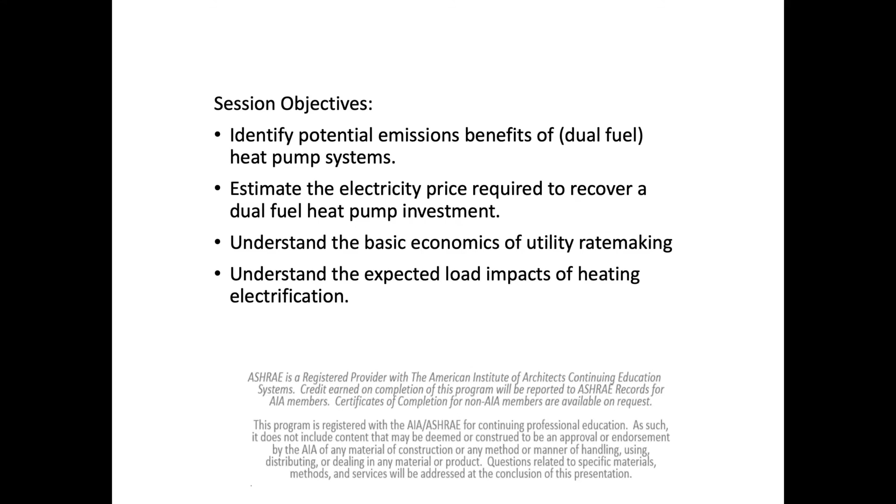Great. So there's been a lot of talk about smart buildings, smart grids, smart everything. What's available right now? So if you go onto Amazon for 118 bucks, you can get 2 light bulbs with a dimmer switch and this little Philips box here, which connects it to your Wi-Fi. I've spent a lot of time playing around with these early on in my PhD. They're very cool, but they're light bulbs. What else can you buy?

You can buy an Alexa-enabled microwave. You can get lots of smart outlets. They even sell on Amazon a smart bidet. I don't want to know much more about it than that. The issue is if you add up all of the energy use from these things, it's really not that much.

So this is data from the Energy Information Administration, which does a survey every 4 years called the Residential Energy Consumption Survey. This is 2015 data. We are waiting patiently for the 2019 data to come out. And if you add up all of your lighting, refrigeration, and all your other plug loads, it's less than 30% of the average energy consumption in a US home. The lion's share of residential energy use, and I know commercial energy use is balanced a little bit differently, but for residential, upwards of 60% of energy use is for space and for water heating.

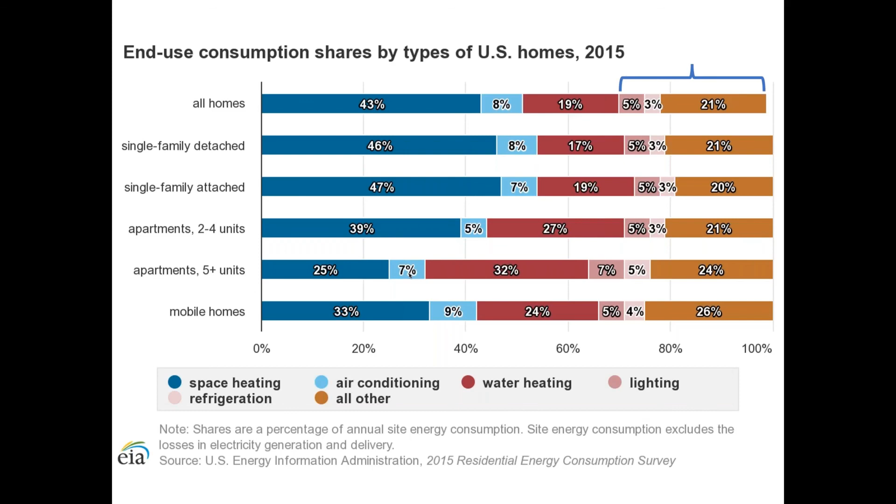So there are multiple approaches to dealing with this. The one that I have been focusing on the most is electrifying the heating in buildings and then providing that with clean power. So we're all HVAC engineers. I'm not going to spend a ton of time on technology.

Broadly, there are 3 technologies: electric resistance, cheap but inefficient; ground source heat pumps, very efficient but very expensive, especially for retrofit jobs; and then air source heat pumps are what are most exciting to me because they're essentially just a 1-for-1 replacement with existing split systems, whether a mini split like this or a full DX split system that you'd see in a forced air system in a home.

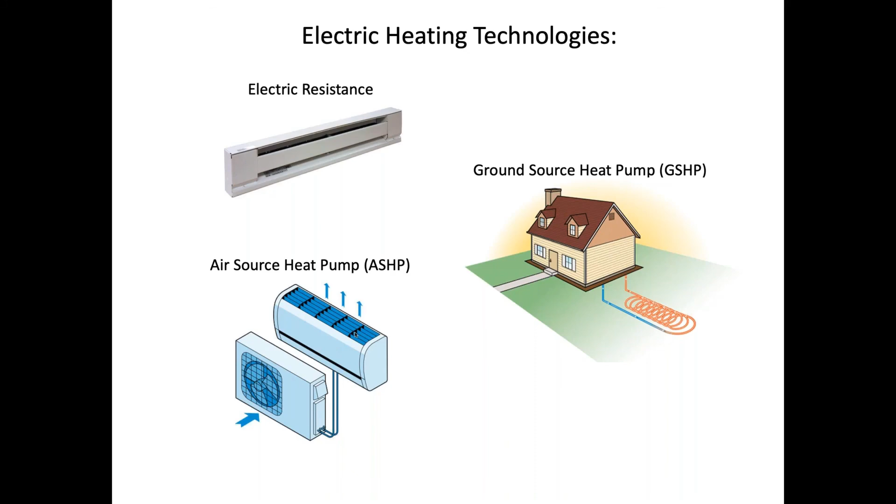Why would electrification decrease emissions? So if we just start with 10 therms of natural gas and we put it through a traditional furnace, we'll get out 117 pounds of CO2 and 800 kBTUs of heat. That's kind of the starting point.

Now, if we have a condensing furnace that's 96% efficient, the emissions are the same, but you get 960 kBTUs of heat. That's a 20% improvement. And that's basically, if there's been a big improvement in the last 20 years, it's this. It's that we're using more condensing furnaces.

On the other hand, if we took that same gas, we put it through a combined cycle gas turbine, which is about 60% efficient, we get out our same CO2 emissions, but we get 176 kilowatt hours of electricity. Now, what we do with it matters. If we put it just through an old school electric resistance space heater, we'll get out 600 kBTUs of heat, and that's really our worst case. That's worse than just burning the gas on site.

On the other hand, if we put it through a heat pump with a COP of 3, we can get out 1800 kBTUs of heat, which is worlds better than any other option on the page. So at least as far as the back of the envelope is concerned, there seems to be some potential for heat pumps.

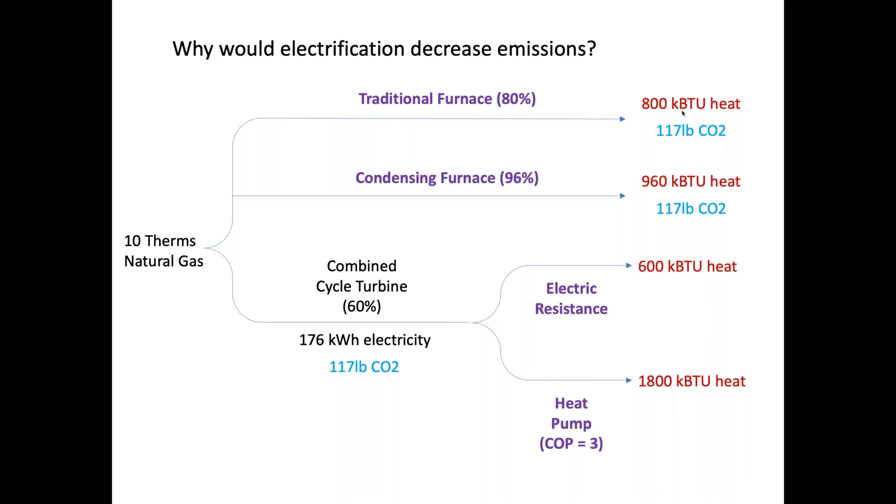Now, having said that, the actual estimates for heat pumps are pretty modest. This is data from the US Energy Information Administration's Annual Energy Outlook, where they project out the next 30 years or so. And you see that for residential space heating, the energy use, and this y-axis is in quads, these lines don't cross. We see modest decreases in demand across the board. Most of that is just a product of energy efficiency, but they don't see any big uptick in space heating.

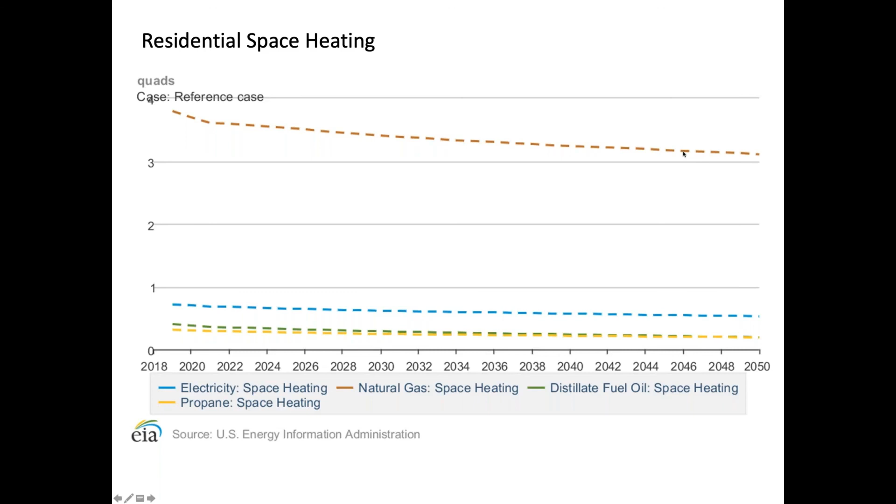So let's say you're burning 3 3/4 quads today, and you'll be burning 3 1/4 quads 30 years from now. You're still bound to chemistry. So you're not going to dramatically reduce the emissions from that. It's still a direct relationship between how much you burn and how much CO2 you get.

Water heating, the projections are basically the same. We're not seeing the same energy efficiency benefits because water heating is already pretty efficient. So we're actually seeing a modest increase in natural gas consumption there, which would lead to a proportional increase in emissions.

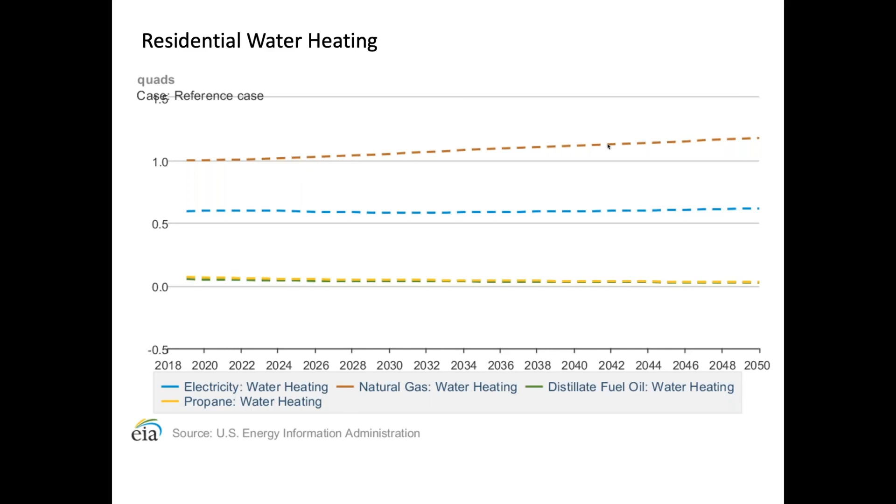So coming from the starting point that heat pumps seem really promising, and yet the current estimates don't project that they're going to be widely adopted, I started asking, well, why? First of all, is there something I'm missing? Maybe I'm overestimating the actual emissions benefits. So the first question is, what are these emissions benefits of heat pump adoption when we look at different climates? And then the second question is, what are the economics?

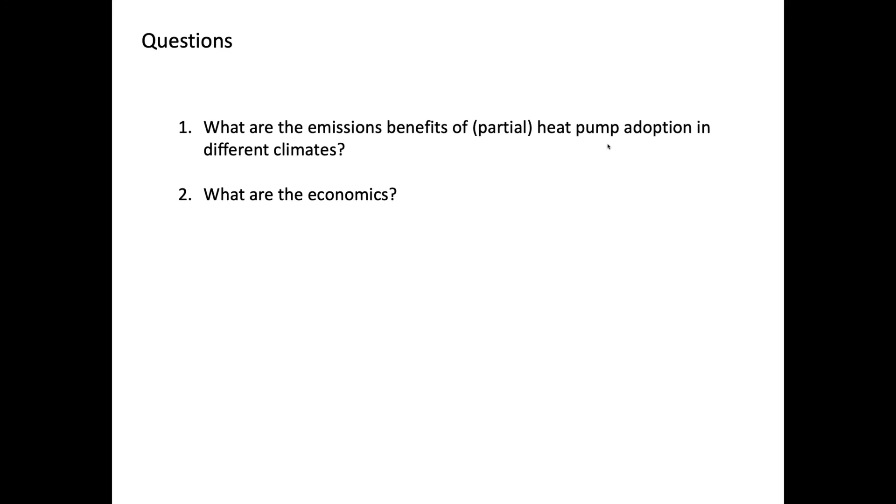We're specifically thinking about hybrid, also called dual fuel or bivalent heating systems. And basically the strategy with a hybrid system is, if you've got an existing home, and most of the buildings we have in 2050 are the buildings we already have now, after say 15 years, your AC split system breaks, you replace it with a heat pump. A heat pump could be exactly the same size. If you've got a 2-ton AC, it could be a 2-ton heat pump, could be bigger if you want to heat it to a slightly lower temperature. You retain your furnace as a backup for those really, really cold days.

The advantage there, and I think you guys mostly know this, is heat pump COPs, the efficiency, really degrades when ambient temperature drops. So you would need a much bigger heat pump to heat a building down to say 20 Fahrenheit than you would to heat it to 30. And the further you go in those extreme situations, you need bigger and bigger heat pumps, and they're operating less and less efficiently.

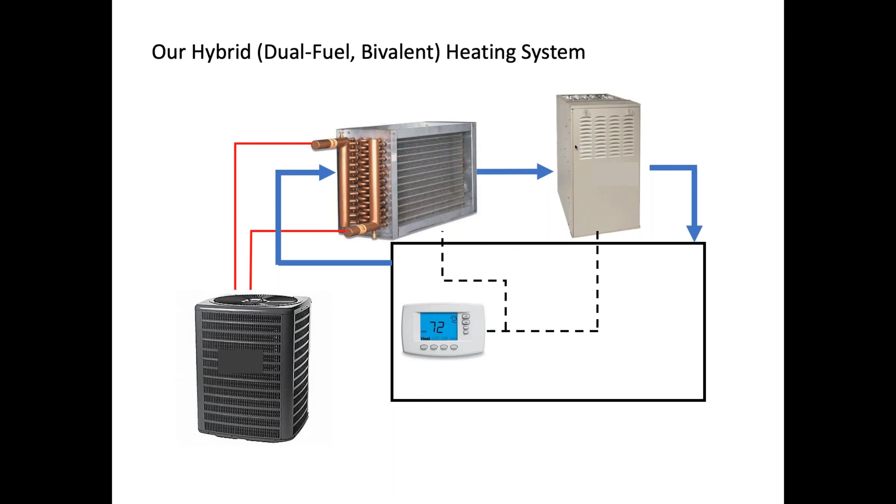The big thing, I think the big sell for this project, and the reason it was pretty well received at ASHRAE Orlando, is because we looked at every climate region in the United States. So according to the International Energy Conservation Code, they give us 16 different climate regions, varying both in your average temperature and in moisture. So I'll just go straight forward to the results and what we found doing these simulations.

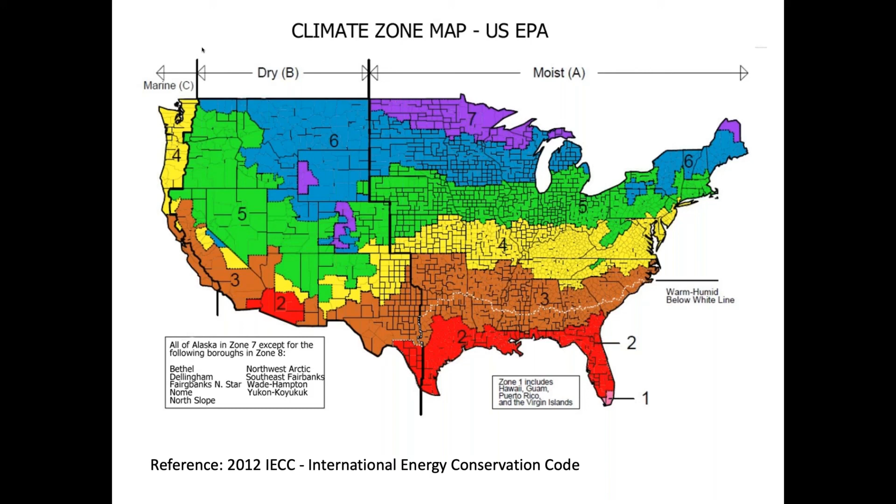And basically we did these simulations in EnergyPlus, taking the same building model, moving it throughout the country, and basically just changing the weather and changing the heat pump capacity, and then doing the math on what it would actually cost to run these things. So each of these different tiles is a different example city, representing a different IECC region. So 1A, Miami, very little heating demand. 3C, San Francisco, more, all the way to Duluth and to Fairbanks.

The two different colored bars: all of the orange bars represent natural gas homes, homes that are currently heated by natural gas. The red bars are homes that are currently heated by fuel oil. And for each of these tiles, the first set of bars shows the base case, where we just replace your old AC that's dead or dying with a new AC system and continue to get all of your heating energy from whatever the incumbent fuel is, natural gas or fuel oil.

And then the second bar is, well, what if we say for this home in Houston, where the minimum size for the AC was a 4-ton unit, what if we replace that 4-ton AC with a 4-ton heat pump? What would the emissions impacts be? Now, despite the huge variance in climate regions we looked at, we actually found pretty consistent results here. And that was really across the board. There are huge emissions benefits to just that first change from replacing an AC split system like for like to the same size heat pump system.

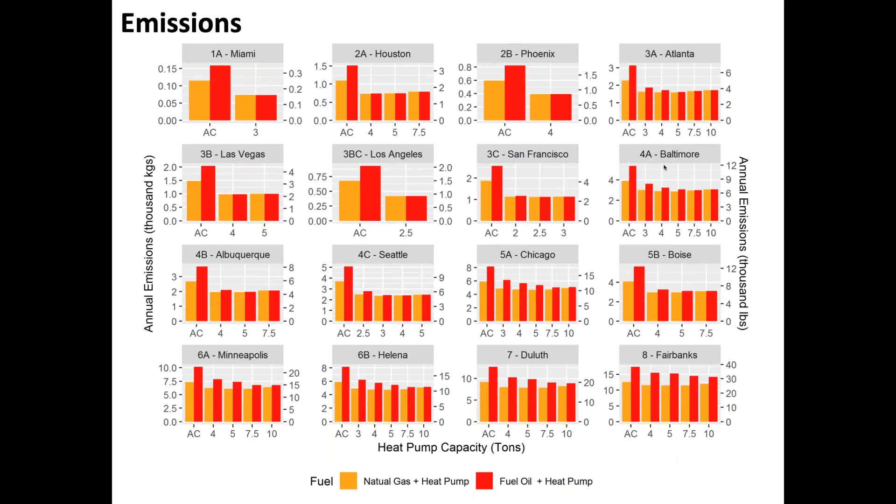So that's really just kind of a hint at what things might look like from an emissions perspective. One caveat I'll put on this is that we just use the same grid assumptions for every city. We didn't actually say, well, San Francisco has more solar and hydro, so it's going to have a different heat pump story than, say, Boise. We're really just trying to look at the weather here. So when you see San Francisco, think more of a generic climate IECC 3C, and if you don't know what that feels like, it feels like San Francisco.

So then the second part of this is at what price would your electricity have to be to break even on this kind of investment? I'm not going to walk you through every term, but this is just a balanced equation where we set the annual cost of a furnace AC system equal to the annual cost of a furnace heat pump system, and then solve for your price of electricity.

And what we found is for natural gas on the left-hand side, in all of these colder regions, regions 3C, 4A, 4B, up to region 8, where heat pumps are really uncommon still, to make this dual fuel system work, you really only need your electricity to be less than, say, 12, 13 cents a kilowatt hour. And this is assuming that you're buying natural gas at $1 a therm. If you're buying natural gas at 75 cents a therm, you would need your electricity price to be slightly cheaper, so less than about 10 cents a kilowatt hour. These are not unreasonable quantities.

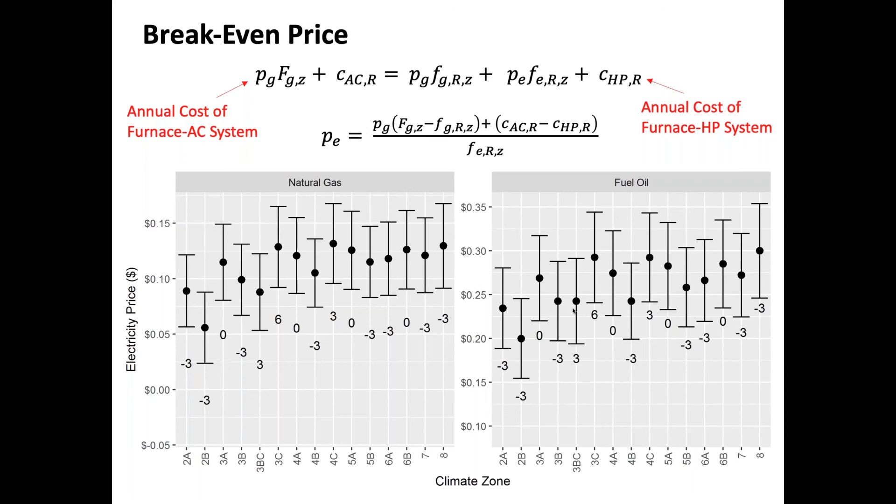With fuel oil at $3 a gallon, that's the center dot, the story is even simpler. There's basically no price for electricity seen in this country, or very, very few places where electricity is so expensive that it wouldn't make sense to switch over from fuel oil. And that's, again, including the upfront capital cost of going from an AC system to a heat pump.

So that's the first half of the talk. The second half of the talk is where we really dive into the utility itself and how did we get these prices, 10, 12, 13 cents a kilowatt hour, and whether or not that's really a reflection of the utility's costs. So I'll just pause for a moment. If anybody has a question, drop it in the chat and I would love to answer it.

Noah, there is one. I don't know if you can see it in the questions. Oh, okay. It says, you mentioned you use the same grid assumptions for all cases. What were those assumptions? 1 pound a kilowatt hour, which is the marginal emissions in most of the country. It assumes a single cycle gas turbine. I will say I have had a lot of conversations about how to do this math, and there's really no consensus about making these assumptions.

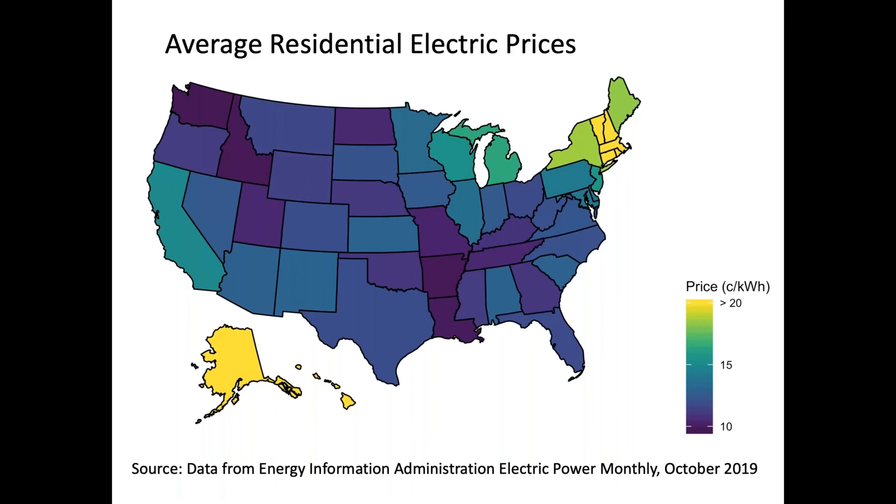Okay. So when you buy electricity from Con Ed, you think you're paying for the power. The truth of the matter is you're mostly paying for other things. Electric utilities are utilities. They're natural monopolies. They are regulated companies that are the only supplier of some sort of commodity in a region, specifically because they operate in industries with very, very high fixed costs.

In the early days of electric utilities, there was competition. You'd have multiple electric utilities trying to serve single customers. It was a mess because you were trying to build all these different wires and poles overlapping. So the natural thing that happened was these different companies would merge together, they would form monopolies, and then they would charge monopoly prices, which is a nice way of saying whatever they wanted.

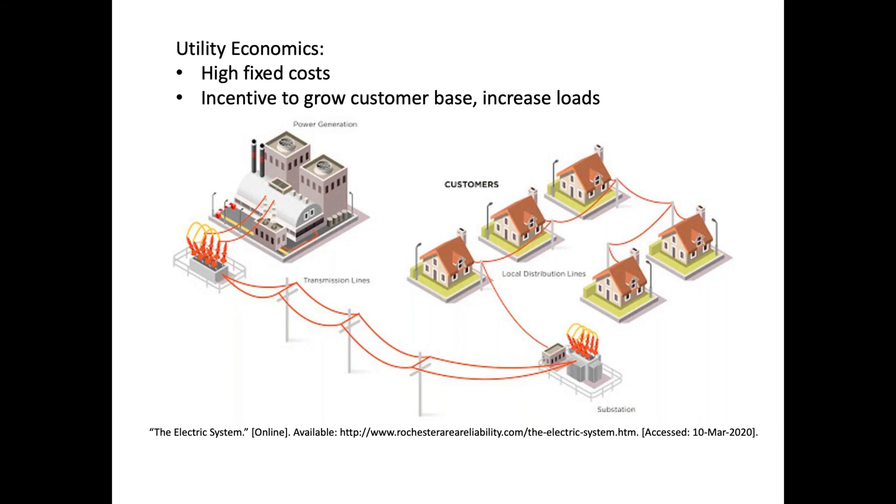Today, we regulate electric utilities so that they can only charge us a reasonable amount instead of as much as they want. But the thing that hasn't changed is that their fixed costs are really high. And when you add up the actual generation assets, the transmission lines, the distribution lines, their administrative costs, all these fixed costs that don't actually vary with my marginal consumption of another unit of electricity, it's huge.

So power production is far and away the biggest cost for utilities, the actual cost of fuel, cost of coal, what have you. However, if you add up all of their administrative costs, their distribution O&M, their distribution CapEx, production CapEx, so that's the cost of the turbine but not of the gas, and all of their transmission expenses, it basically rivals power production costs. And in places like New York, Con Ed, it's actually significantly more.

So how is that handled? It's handled differently for different customers. For commercial customers, you typically pay a demand charge. So your allocation, the fraction that you pay of a utility's cost, is proportional to your peak consumption over a 15-minute period or over an hour period in a given month.

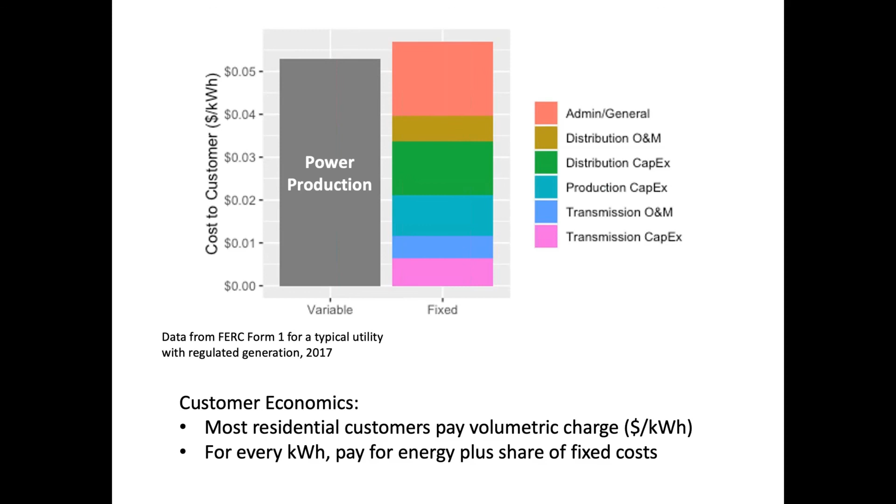Residential customers overwhelmingly pay through a volumetric charge. So I take some weighted average of the cost of power. I add a couple cents a kilowatt hour to cover all of those fixed costs, and that's how you compute your 10, 11, 12 cents a kilowatt hour. This is a problem that's been pretty well studied in the economics community, and it's kind of a hot topic right now among energy economists.

So let's say, I'm going to walk you through this hypothetical, and this is not my work, this is from an economist at Berkeley, Severin Borenstein. So let's say the marginal cost, if you imagine a utility that only has single cycle gas turbines, and when you shake it out, it costs them 5 cents a kilowatt hour to produce every single kilowatt hour that they sell me. Now, if I only paid that 5 cents a kilowatt hour, they wouldn't have the money to provide the distribution infrastructure, the generation infrastructure, the transmission.

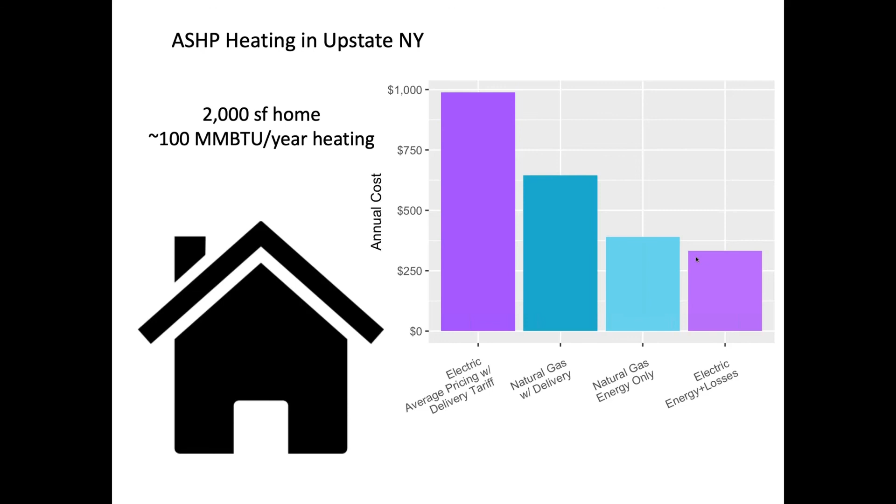Now, utilities aren't totally naive to this, so there are tariffs out there specifically for electric heating in homes. This is based on a little mini project I did with an undergraduate researcher last year, where we took data from the US Utility Rate Database, which is managed by the EIA, and we found that there were about 600 utilities that have some residential rates specific for electric heating. We then went to those utility websites, we actually dug into those rates, and we realized that there was really not common sense to how they structured them.

And we did the math, and this was a lot of fun, and we found that if you have a really big house, you do save a lot of money. So if you've got a 5,000 square foot mansion in Connecticut, then this is a great offer for you, and you should be heating with heat pumps. But if you've got a smaller home, say 1,200 square feet, you actually are going to lose out in the long run.

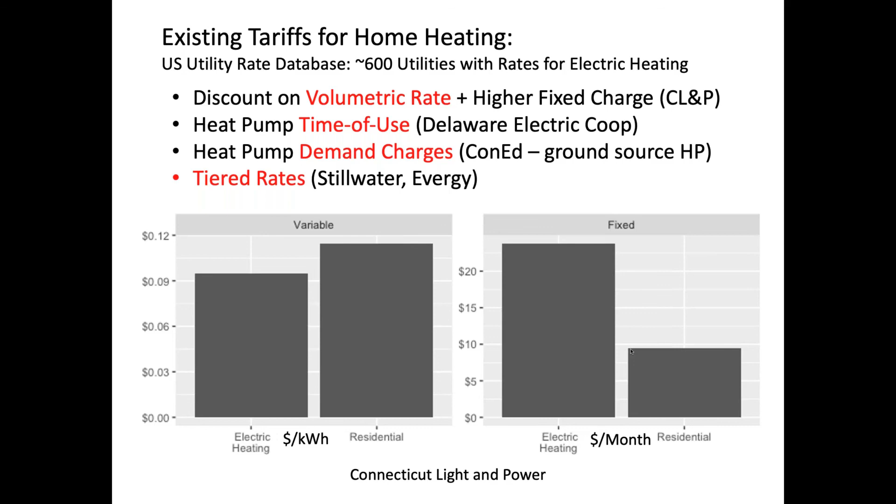I think one of the reasons that utilities are a little bit concerned about wide heat pump adoption is that air source heat pumps in particular, and all heat pumps to an extent, are really, really peaky. And you get that from the weather. In New York, for example, in the summer it's in the 80s. It can get up to the 90s. It very rarely gets much hotter than that. In the winter, that risk is much different. So a lot of the winter, it's in the 30s, maybe even 40s. Sometimes it gets into the teens, but then you have these amazing cold sprees where it gets into the negative numbers, and it's really hard to be prepared for that.

So what we did here is we modeled different levels of heat pump adoption on an example feeder located in upstate New York. The gray line underneath here is the existing feeder curve, where this black is the average daily consumption, and the gray represents the maximum and minimum consumption. If you add electric heat pumps to 20% of the homes, backed up by resistance, you find that, as expected, it doesn't actually change the demand at all in summer, but in the winter, it does change the demand. And even at just a 20% adoption, this one really cold day that they had in January of 2019, I think, is enough to actually push the load all the way up to the feeder's capacity, the red line.

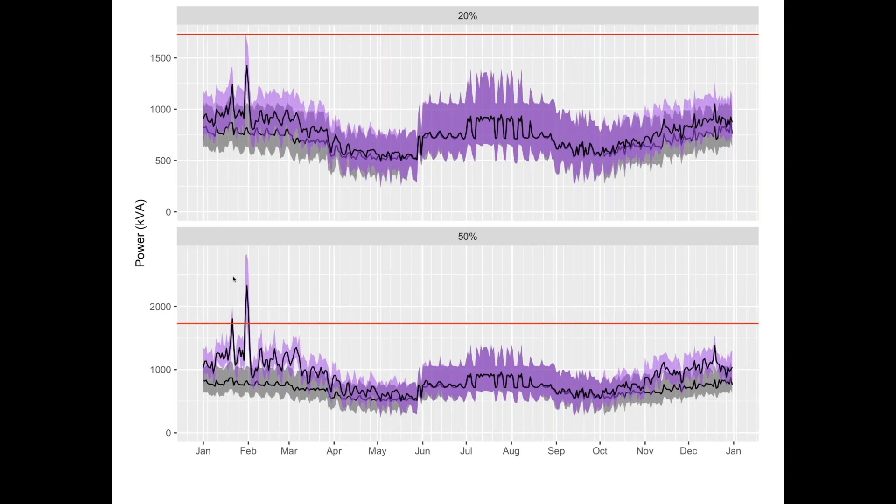If we went up to 50% heat pump adoption, we would need to add almost twice as much feeder capacity just to plan for that one really, really cold night that may or may not happen once a year. And if we go to 100% heat pumps, the case gets even uglier, which is really kind of, if I don't have you convinced on dual fuel already, I hope this convinces you that it's something to consider, not just for the building owner, but for the utility. This is a really hard thing to plan for. This is a really, really expensive utility system. But again, if you're backing it up with some sort of liquid fuel or gas, something you can combust for those few really bad days, then you could actually end up with a better use of existing utility resources.

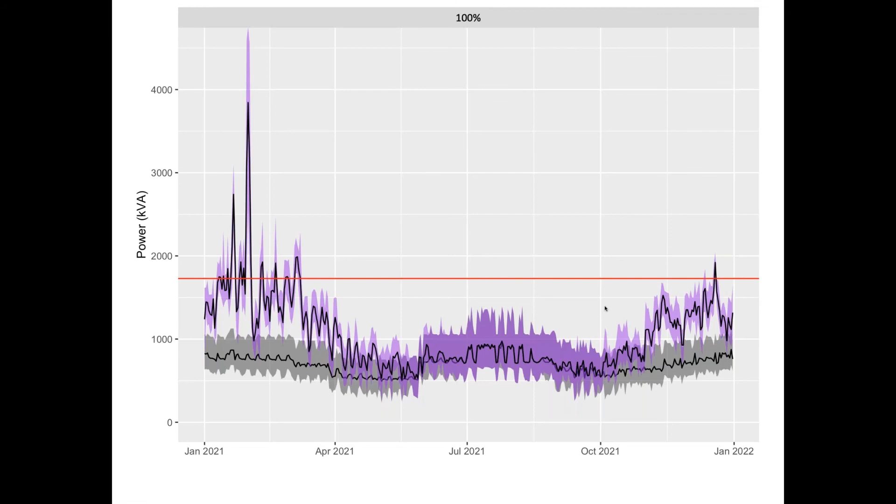So this is basically where I'll leave you. We've been doing just a little bit more work on this, trying to figure out optimality. Basically, the project is we know what it actually costs to procure electricity. We have an understanding of what the utility's fixed costs are, how much it might cost them to expand a feeder's capacity, and we're trying to figure out what is actually the optimal way to do heat pumps, to do electric vehicles, considering all these technical constraints. And then based on knowing that function, we would then say, what are the least bad tariff structures?

Now, we know volumetric tariffs can be really ugly because customers have to pay that same additional 5, 6, 7, 8, 9 cents a kilowatt hour, even if their consumption is happening off peak. But what's an alternative that might be something that customers would find admissible, and also would allow for some decarbonization?

So in conclusion, hybrid systems, really promising, big emissions reductions potential, and that is going to keep going up as the grid gets cleaner. And then the other thing to think about is that if you're hearing talk about redesigning electricity tariffs into something more complicated, know that it isn't just to punish you, that there may actually be some societal level benefits to giving slightly more accurate price signaling.

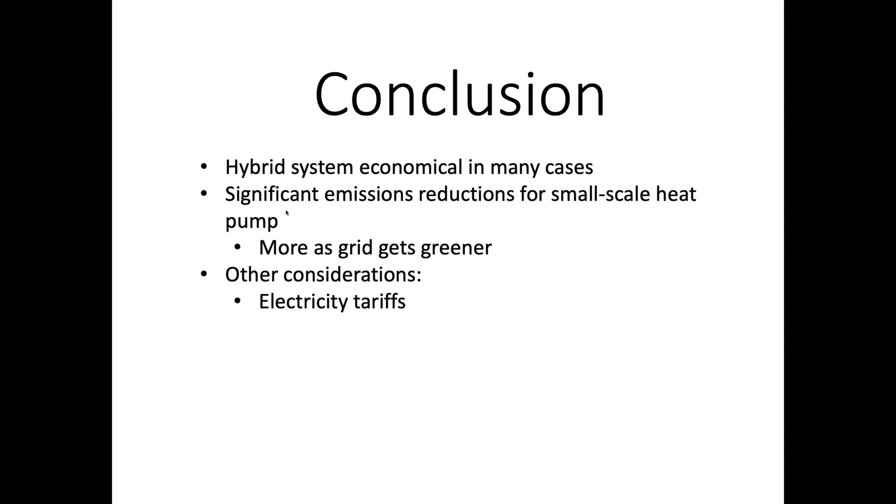Thank you, Noah. There are a couple of questions that came in. There's one from the first part that we did not answer. I just want to make sure we get an answer for our attendee. It says, you said your break-even calculations included the upfront capital cost of a heat pump system. Is that assumption the total cost of the new heat pump system, or the difference in cost between the heat pump and replacing in kind?

Difference. Very good question. I'm sorry if I wasn't more clear about that, because it is really important. The idea is, what should we plan for when air conditioners die, which they do. Most homeowners, if their air conditioner gives out in July, they're going to try to get an exact same new one as quickly as possible. We're trying to understand if maybe the rule of thumb instead should be, I'm going to replace it with an in-kind heat pump, which is only a little bit more expensive, should be the same install cost.

Next question is, in areas like New York where electric rates increase heat pump operational costs during the heating season, did you investigate if energy savings during the cooling season will offset? Oh, that's a good question.